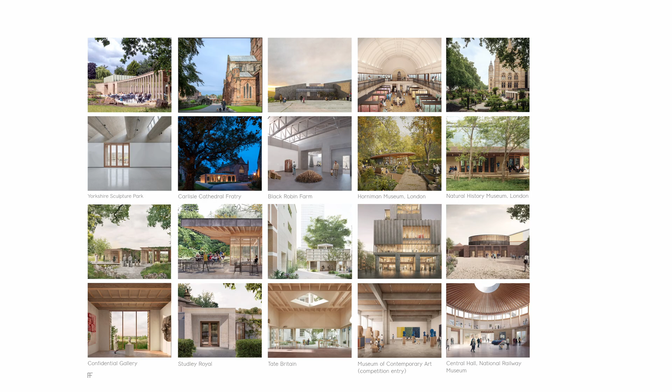And I think visiting our sites is really critical as well. So this was whilst the Natural History Museum was on site, and we take the team to try and develop a shared ethos, shared values, shared references as well. Sometimes that's quite useful.

And these are the public buildings that we've currently delivered and that we're currently working on, ranging from a number of galleries and museums through to landscape projects, and more recently branching into more master plans and things.

The scale of our projects has quite rapidly grown over the last 10 years. On the farm site, the bottom left was the first structure we did. Then this is our studio frame. The next one is the barn at the end. This was Homerton College. And I think we need to do a new diagram for the Railway Museum, which will largely fill this page. So big, broad span timber structures, but trying to use as much craft as possible.

So on Homerton, for example, there are no metal fixings. We don't have flitch plates and things. It's using traditional carpentry methods despite the scale.

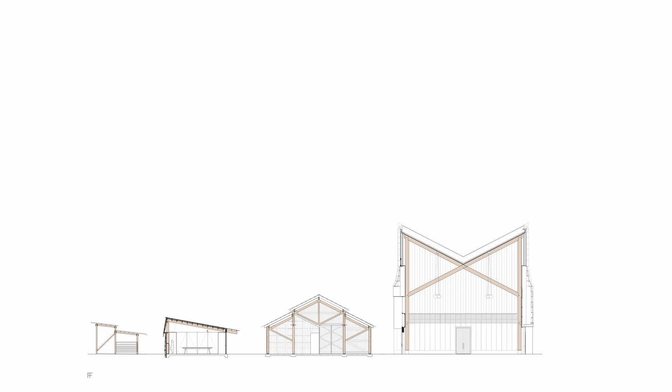I think how architects grow from doing small-scale, beautiful, bespoke projects into something much more large and commercial, but that retains the soul and the feel of smaller projects, is really fundamental. When I look at what happened in the UK with lots of architects, they were delivering exquisite projects, made their name, and then they won some big commercial projects, they grew rapidly, and something shifted. So it is a challenge, but we're trying our best to retain the essential values of where we started.

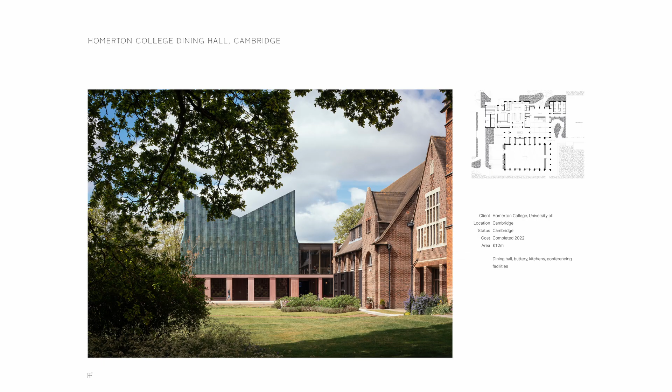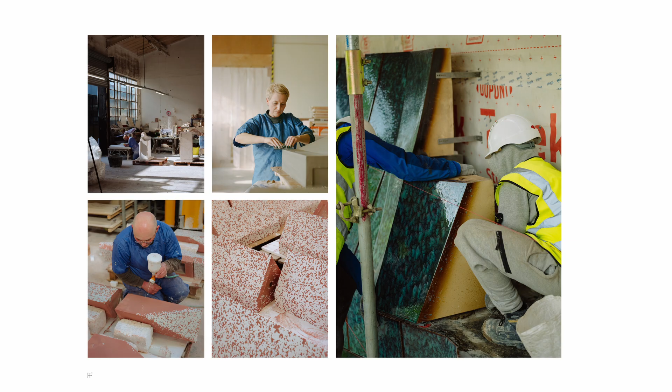So we're working across education projects. This one is at Homerton College, where we developed lots of elements to do with faience and ceramics, using the timber as I described - this is the jointing here.

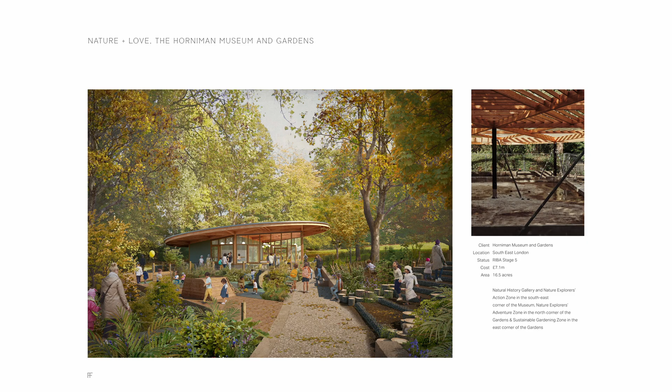This is a cafe and play space down in South London for a museum at the Horniman Museum. And again, landscape and architecture for us are always overlapping.

A big project that I'll tell you a bit more about shortly is the Railway Museum in York, and that one is going on site now. So in 18 months, this project will be finished.

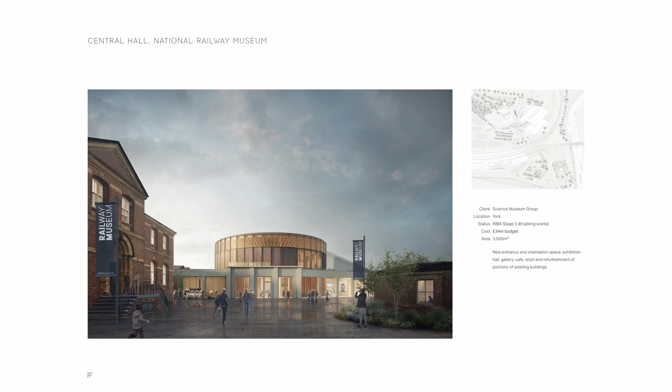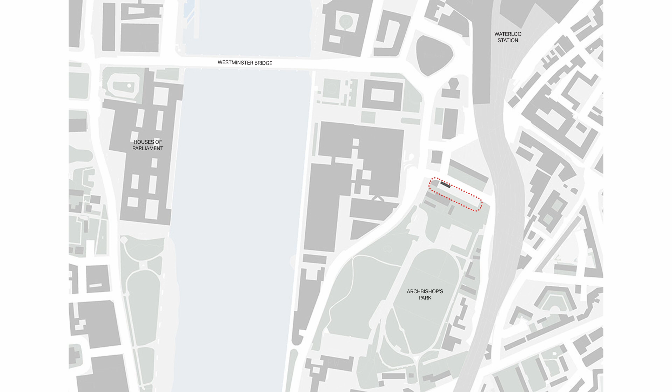Initially, I'll tell you a bit about our studio, just because it's an unusual setting and it's helped us grow as a practice, both developing culturally but also in terms of our design. We've used it a lot to win work by bringing clients through the door and saying, this is a manifesto for our practice, and this building exemplifies what we're interested in.

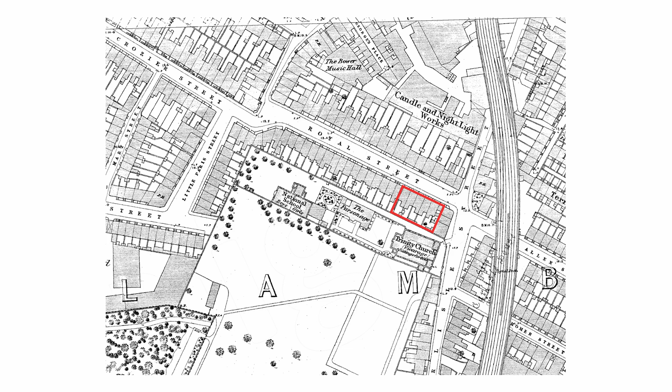When we started, it was a complete jungle - a wasteland. It's a temporary site, and we were told we would have a 5-year lease for free on this site, so we cleared that site. It used to be former terraced housing, which was bombed in the war. Then it was used as a market garden, and it's gone through a series of uses. For the last 30 years it was completely unoccupied. And so we were given 5 years.

Then this barn was being funded in different pieces, and initially they were saying they wanted shipping containers, but the brief to us had been: we want the best city farm in Europe. Now, of course, how you quantify that, who knows, but in terms of design, we were saying, okay, if you want the best city farm, we're not going to do another container yard.

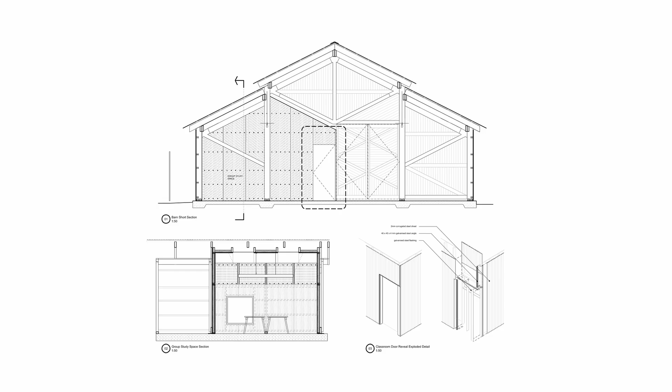We're going to support you with the funding and give you an identity, and this barn could then be used to be rented for weddings and events, and that became the generator to make the whole site sustainable economically. There were some very simple themes here, almost like a church section - we have a nave and aisles - and there was something about the ceremony of putting the barn up, about bringing the community together, getting people invested in it, and about the legibility of everything, so you can see how the structure is made. This barn lasted here for 7 years, and now it's come down and moved to South London.

That's one of the major challenges - all of the projects here were designed to be moved. Initially it was being used as an open structure, and then later on we enclosed it, and it started to get used for different purposes, like having an outdoor classroom and things. So many people have come through this space for different events, people I wasn't aware of, and you find out down the line that a client has actually visited the site for some reason.

But all of this was at risk, and initially quite a big risk. When we built the barn, we thought we would have 3 years. Then the global pandemic happened, and then the economy crashed, and all of these things meant the whole project got delayed and delayed. So we were due to be kicked out in 2019, and we're still there, and we've now taken on a bit more space. Some of the site has moved, and some of it has been retained.

But it was about giving a dignity, giving an identity, and a really robust, simple structure. In a way this is the least contextual project of the ones I'm going to show today, because it was a meanwhile space, derived really through budget and identity. There were references back to agricultural buildings and the long history of the site, but not so much the modern nature of this part of London. But London is a melting pot of architecture, people, and everything, so depending on where you're working, some bits are much more sensitive than others.

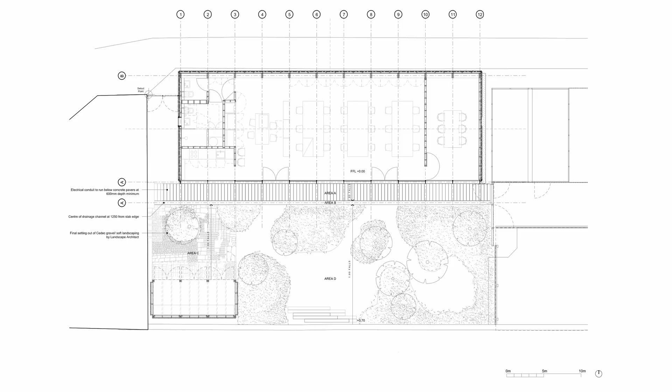I won't go through these bits, but we've done additional structures over time which have come into it. Our studio is very simple - it's a timber frame structure designed to be taken apart, and it's conceived of as part of a wider walled garden. There's a datum, a bit like we have here with the windows, that wraps around the studio, and then we have glazing and the garden. So the concept is that our studio is part of the walled garden, and the two flow from one to the other.

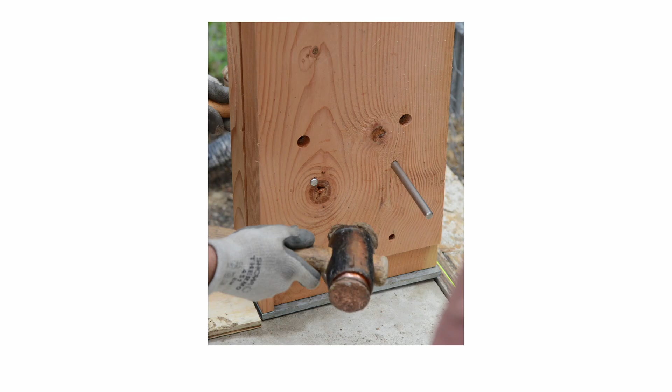And it's demountable, and that's going to be put to the test in the next few years. It was all put up - oh, this is quite a nice shot, because this is a guy called Alex, who was our first employee. He really should have been part of the partnership because we studied with him, and he was with us for 3 years, instrumental in the foundations of the practice. And then he felt that we probably didn't know enough about building, so he went off to become a carpenter.

And now he has an incredible practice called Timber Workshop, doing some of the finest timber frames. It's funny how these things diverge, but his first project was our studio. He then built the barn, and so these long connections of interwoven friendships and all sorts continue, and they're really fundamental.

And quite utilitarian as well, using things like standard lintels from the builder's merchant for our paths, reusing as many of the bricks that we found on site within the paving, and trying to make it as much of a circular economy as possible. And then sitting among these big beasts. But in the future, all of these buildings - there's a master plan to take all of this down and put a new heart hospital, residential things, and all sorts. So quite a big shift.

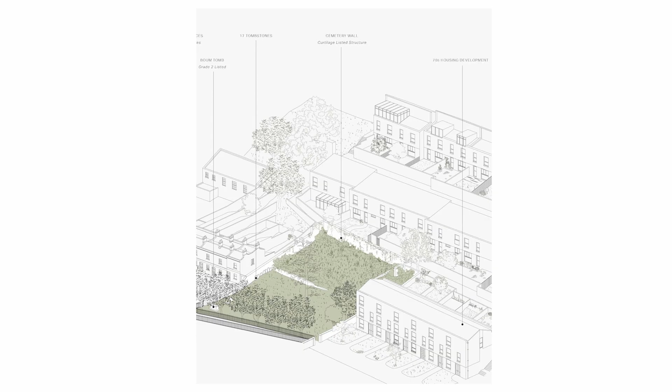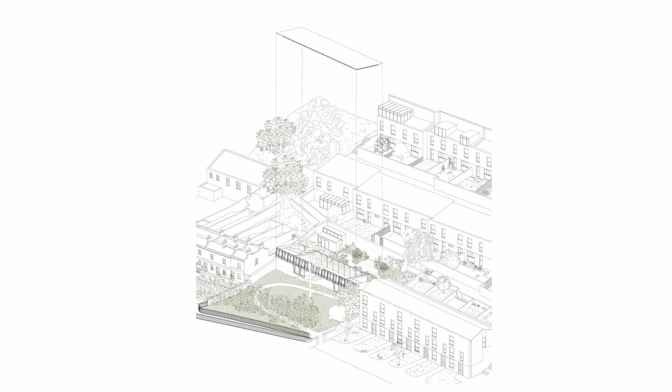In the meantime, we found this - a closed graveyard, closed for 150 years. This is where the studio is due to be moved to, and it will sit very lightly on this graveyard in Bath. So over time, what we want to do as a practice is start to draw a line across Europe from the west - from Bath in the west, London, and then hopefully in the future we'll be doing more European work as well.

So I'm going to talk to you about our first public project, called the Weston. It's up in Yorkshire at the Sculpture Park, and it was won through an invited competition, which is actually how much of our work comes about these days.

I love an invited competition because normally there's the chance to actually meet people and develop relationships, whereas some open competitions, while wonderful if you can win them, make it quite a challenge to connect with the end users and the client.

There was a massive storm, and it was such a big storm that my phone got wet and died, so I had to find my way through instinct, past the crematorium and all these parts of northern England, which are quite depressed to be honest, and then arrived at the Sculpture Park.

So maybe on some level that shaped the approach, thinking about how to create a building that protected you from these elements.

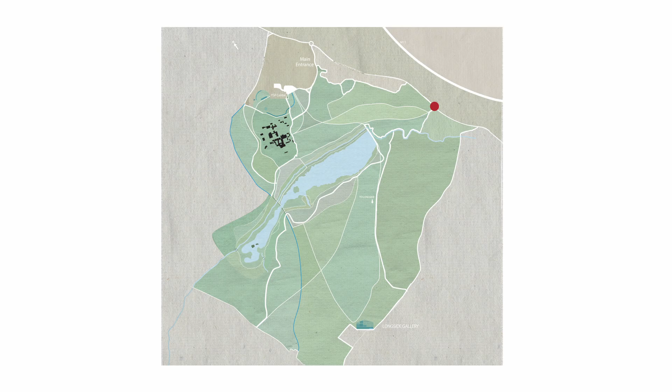I wasn't aware at the time, I knew it was a very special project, but I didn't know that it would necessarily shape the whole future of our practice, especially the connection between architecture and landscape, because that's what we've ended up being known for largely.

So across this site, at the top we have the main visitor centre, and at the bottom there's this place called Longside. People walk across the park, and it had probably 600,000 visitors when we started the project.

But what happens on lots of public sites is you get honey spots, or honeypots - some places are swarmed and overrun with people, and actually the visitor flow doesn't necessarily work as well for the organization.

So they wanted to create new routes, new destinations, which could then open up sculpture trails and things. The red dot is where our project is, and that top swoop in the right-hand corner is the motorway.

The motorway is noisy, it's quite unpleasant. We are a few hundred meters from it, but that was not the context we wanted to look at. We wanted our building to be addressing the sculpture park.

So some of the questions we were facing when we started the project: first of all, what does it mean to build in a sculpture park? Is it a building? Is it a piece of sculpture? Is it something that wants to be a building in the round? Should we use an existing context, or find a completely different area?

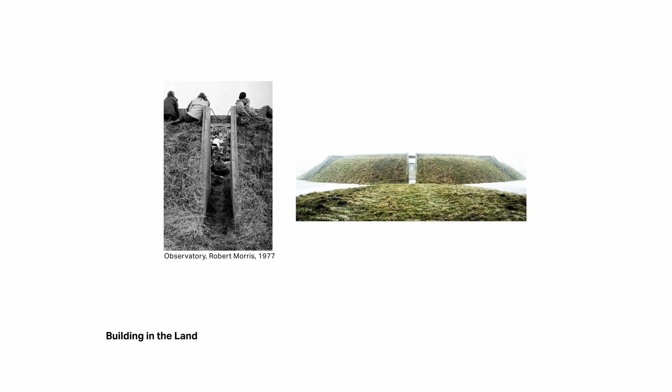And here we've got Robert Morris. This was a piece called The Observatory, and this was about sun paths. So again, layering in all of these different real and perceived constraints and opportunities.

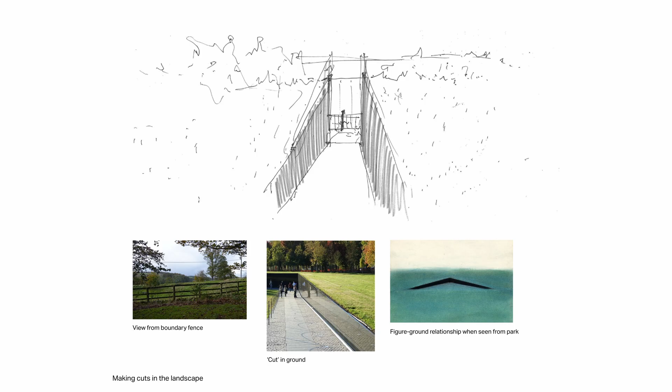At the interview, it wasn't really a design competition as such, but inevitably we wanted to show how we were thinking and how we would approach it. So was it about views, a cut in the ground, a figure in the landscape, what kind of destination, what kind of form, what would we do with the topography here. So just early thoughts on that.

We have the fifth elevation, so you can drop light in. We also have this arc looking out towards the sculpture park, and I always thought of it as having a big wingspan, its arms embracing the people coming across the park.

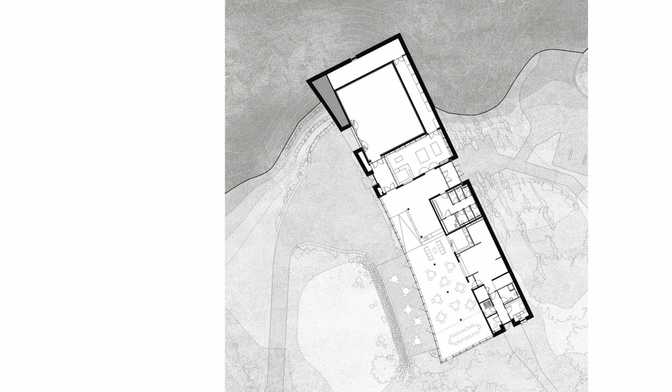And then on this other elevation, you descend into the ground and come through this moment, and suddenly it opens up. So some of the kind of English landscape traditions about conceal and reveal, about mass and light, about texture, smoothness. Some of it was very refined, some of it very coarse.

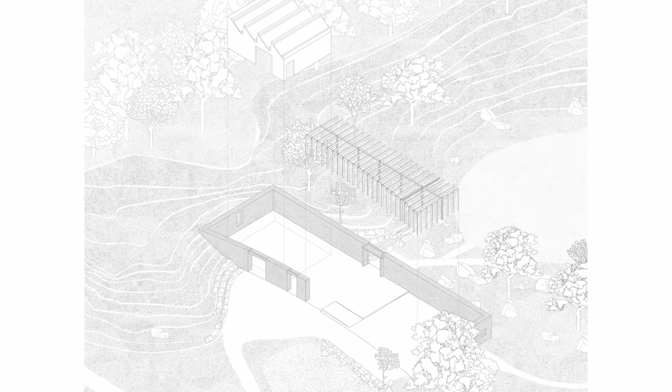Initially it was going to be constructed from rammed earth, but because of a number of factors—regulations, funding, the Arts Council funded it—we couldn't get warranties, so we ended up making it from local aggregates. It did become a concrete wall referencing all of these different rock types and quarries in the area. So we sourced different aggregates from here.

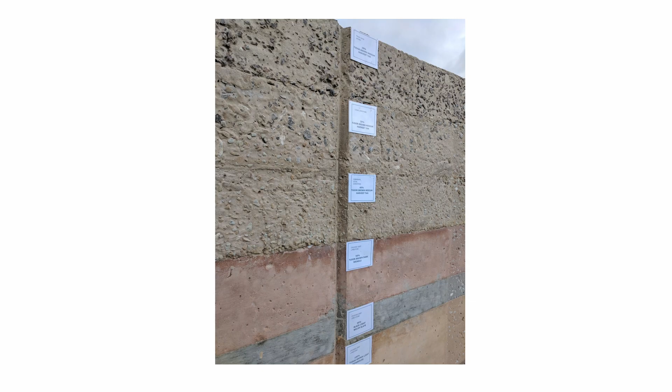And then we did a number of tests to try and find the tones that were like the stone there, which is called millstone grit. It's not particularly beautiful, but it does have certain qualities.

This always made me laugh—I was working with this guy Ross. These are the contractors, and you can see how terrible some of the early trials were. But that's why I think it's important to have prototypes and get involved and understand where things are going wrong and what might happen. If we had just specified it, it could have ended up like a very stripy, hideous building.

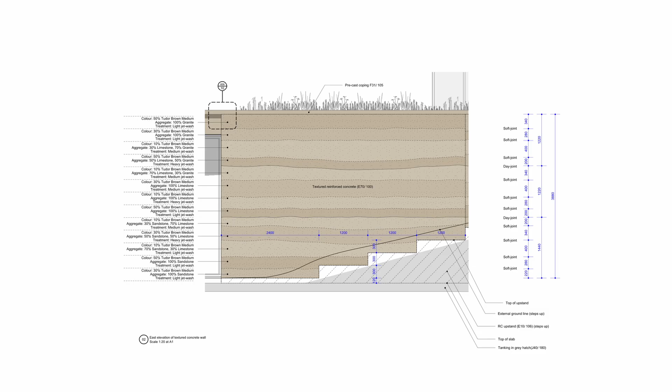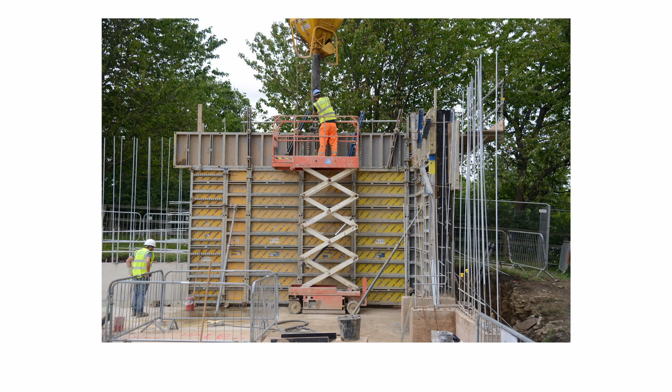So we tried to control it within reason, and we certainly selected all the aggregates, the size of aggregate, and the methodology. Then these guys who had never done anything like this before came along, and there were moments that were unexpected. You can't really see it in this image, but where it was sprayed there were erosions as though it had been there for 30, 40, maybe 200 years. So that was really nice.

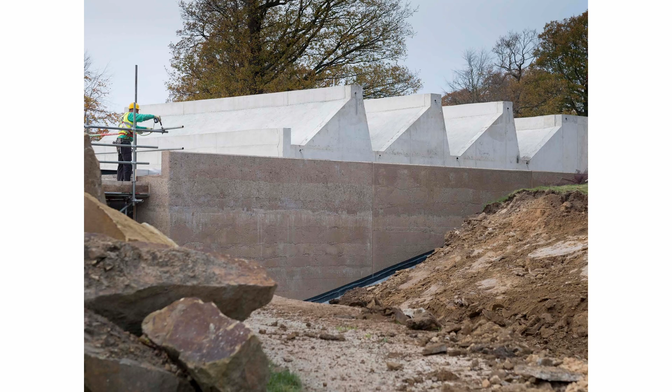And then here you can see the tones—this is the landscape which we've cut away, and that's the tone of the building. In a way, that was almost my favorite point in the whole project, because the gallery has a real presence. You can see the north lights, and then the retaining walls and things were very much of the land, which was how it was conceived.

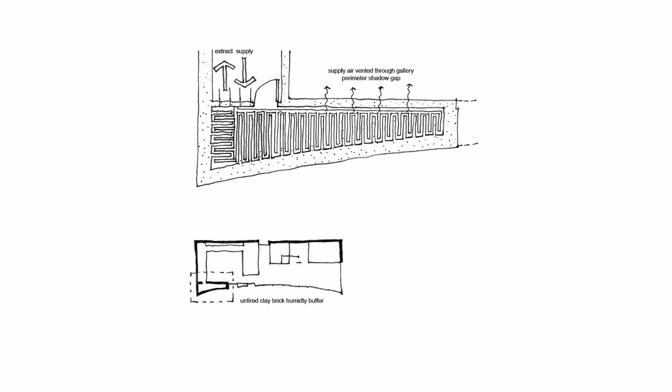And speaking of the land and of clay and of brick and things, we did a humidity buffer here. All of these bricks are unfired clay bricks, so they're hygroscopic, meaning they regulate the moisture content in the air. There are some holes on the right-hand side you can see in the gallery wall. We were regulating the incoming air to get it roughly to plus or minus 4%, 50% relative humidity, which was required for the artwork. You could bypass air through this, but the only shame is people don't see that, though knowing it is a very nice aspect of it.

I think it's always good to reflect on what works and what doesn't work. One of the criticisms of this project, and I think it was totally valid, was that we hid those north lights, that we created a screen around it. For us it was about the light, and you would sometimes read the forms behind it. But in a way that was partly because of our relative youth at the time, and we were trying to do too many things. When it came to judging, I remember them saying, why did you cover those up? It was partly because of cost and things, but really, at the end of it, no one ever comes back in 30 years and asks what the budget was. They just want to know whether it stood the test of time, that it's a robust, beautiful building. One day we'll all be gone, but hopefully our projects will be standing.

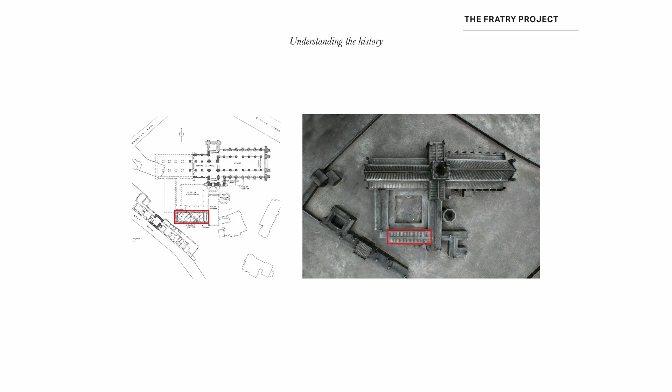But Carlisle is in the far north of England, and it's a hard place to get to. One of the reasons we were told that we won the job was that we said we will be involved throughout. I said that I would be involved throughout, not realizing that many 5:30 a.m.

trains would be quite tiring. But it was all about the relationships. And when we started, there's this building here, which is the old Fratry building.

And then internally, it had curtains, it was dark, it was stained, it was smoky. It was really not a very beautiful environment, although it did have a 17th century library. And the cafe was underneath, and the cafe was a pretty dreadful space, to be honest, in the vaults, and very municipal and a bit depressing.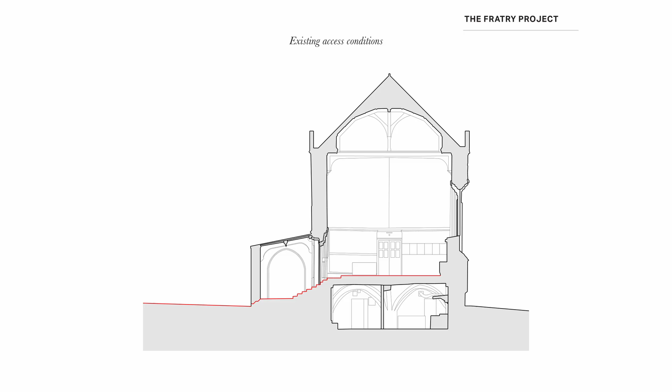And in terms of accessibility, there was no accessibility. You had to come up the steps. So this is that doorway there. You can see, so two flights of steps, even internal steps, a screen in the middle of the main space, all sorts of issues, really.

Actually, a few of our projects have had former lives, former architects and former designs. This was one. Somebody had been working on this for 10 years, and eventually it didn't get support from the key people. The key people in this case were called the Cathedrals Fabric Commission. They're a bunch of very well-to-do, old, generally white English people who, in theory, are there to preserve the cathedrals.

And sometimes they do, but we had to persuade them. So, and actually, I have to say, they were very good in our case. We tried to give a really clear narrative. The narrative was around recreating a cloister and about creating a space in the heart of the city again.

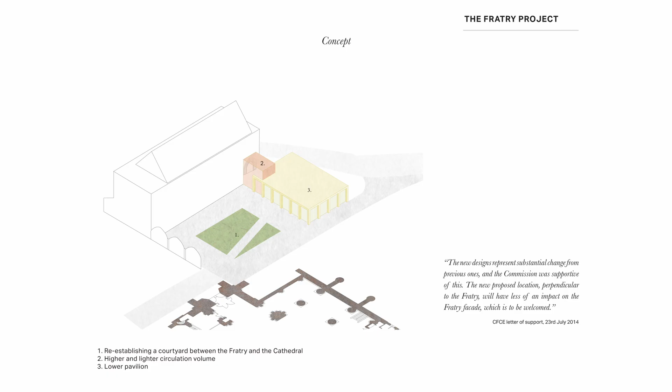So the former scheme was much smaller, but it was hugging that edge of the building where 2 is. It was like extruding number 2 all the way across that yellow box. And we said, I think it should have a smaller connection. I think it should just have a lightweight connection, and then it can breathe in its own right. And it doesn't have to be something that has to be too shy.

And we decided to take the cafe out of the basement and put it into this space. And it was to slow people down on their way through the precinct, and that they could sit in the cafe and appreciate where they were.

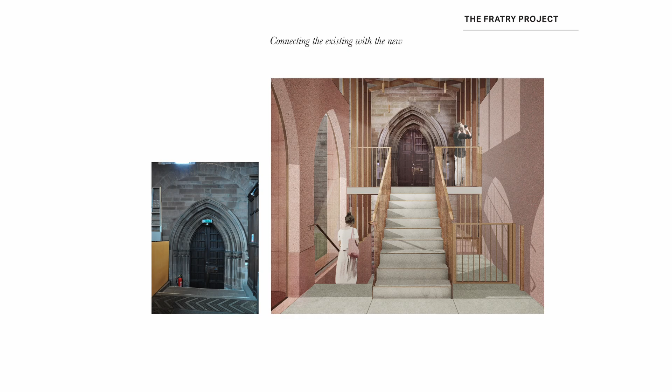Sorry, I don't know whether it's not actually projecting, is it? So you're okay. Can everyone actually hear me, by the way? Yeah? Okay, good. So that would be a shame, wouldn't it, to ask that right at the end.

In the second image, you can't see it, but there's a beautiful lattice ceiling. And that for us was one of the inspirations. So we were just looking around the whole precinct, trying to say, what has happened here?

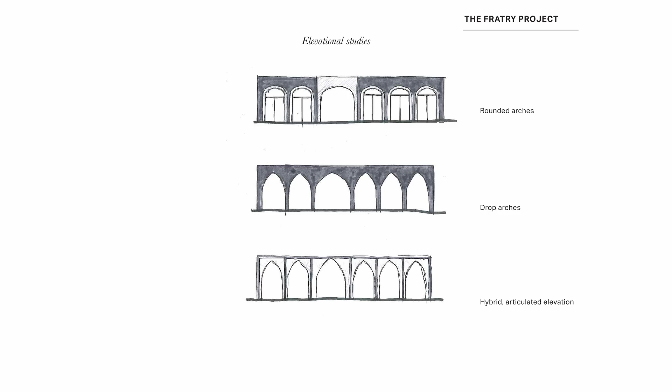And we thought, well, maybe we could explore that. So we were looking at different forms of arches, but in particular the dropped arch. So this is the Fratry, and this was our kind of quite simple analysis of that geometry and how we could take it into the new building.

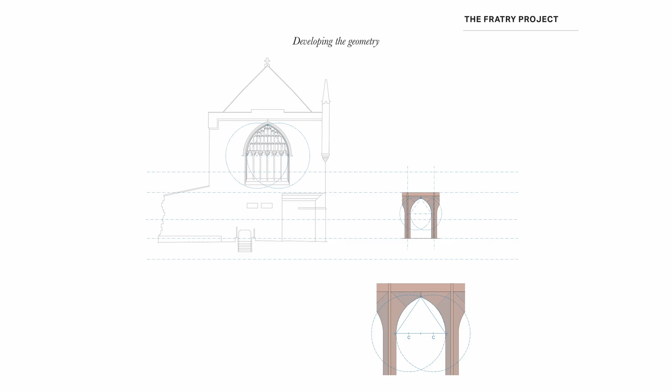So originally we were going to have a rectilinear, much more contemporary building, but we ended up merging the styles, which can be a bit risky, but in order to bring everyone on the journey, that was really important. You can see our building in the background in this elevation, kind of that rhythm running on.

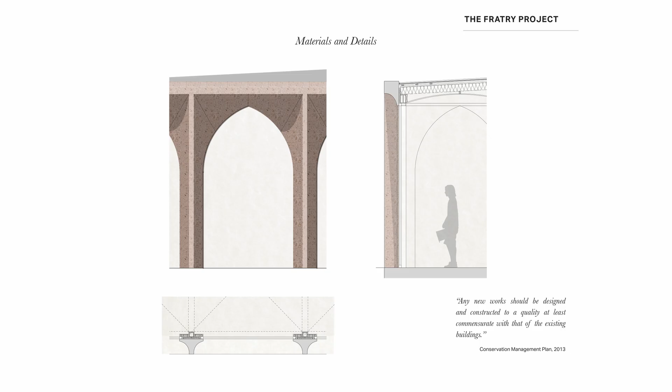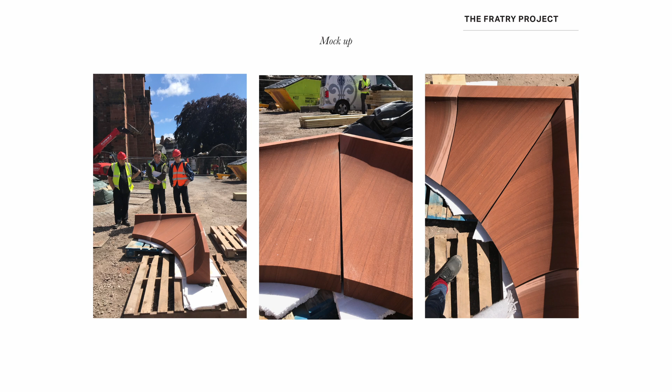The thing which I really liked about it is that it's all using local sandstone, called Locharbriggs, and it has this beautiful veining in it. The thing which I loved was that it catches the light in a different way through the day, and you'll see in a moment with some of the images.

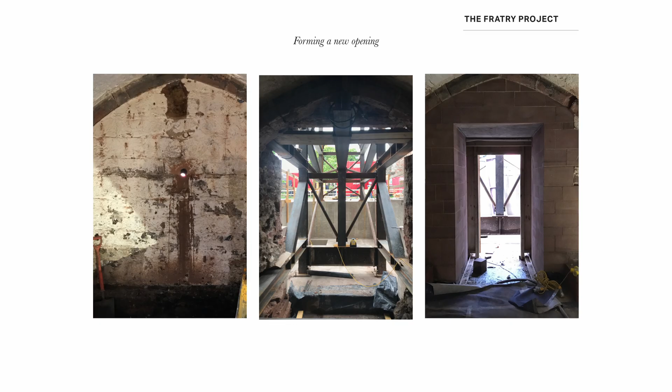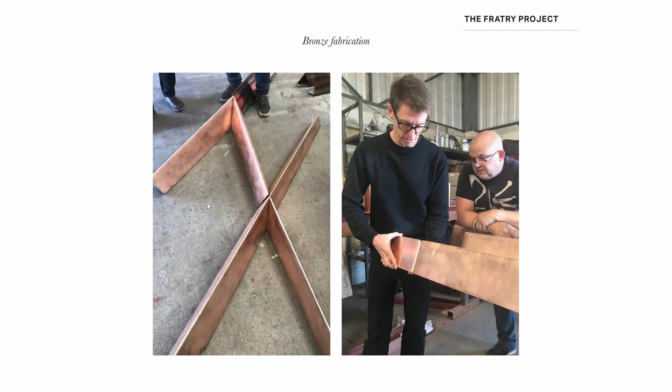So this was reversing that doorway, discovering Viking graves and all sorts of things. The bronze worker, we ended up fabricating it with a bronze worker in Wales. It was a very tight budget, but we had a local contractor and everyone - it was kind of a project of love from everyone really involved.

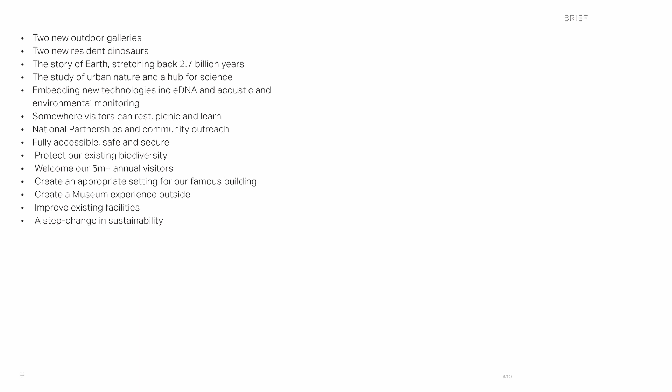So it has to be very hard wearing and deal with huge numbers of visitors. There were so many different partnerships that came into this, but the education and how the landscape was used as a tool for the education was really fundamental.

Luckily, the drawings actually project best, I think, on this, so it's quite good. They've got lots more drawings in this one.

So it's just off Exhibition Road, where lots of the big museums in London are, connecting up to Hyde Park. There's the Victoria and Albert Museum next to it, on the other side of Exhibition Road, and then we've got the Science Museum, and the Natural History Museum is everything in grey here, but it also extends significantly further back. And the main entrance is in the centre, and then they've got these 2 very different gardens on either side.

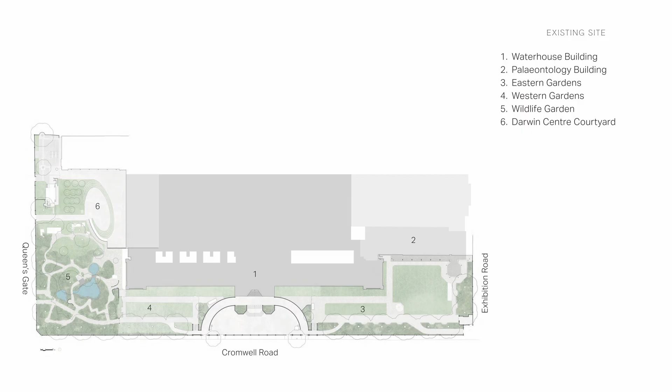When we started the project, the landscape at this site had always been very neglected. It was used commercially - they would put an ice skating rink in the winter on this grass, and they would sometimes have some exhibitions. But really, it was a huge missed opportunity in the centre of London, where lots of people also don't have access to good greenery, especially within a 500-metre radius of this site. There's almost nothing.

There is a huge park further north, but for families and things, when they wanted to come to the museums, it was an internal experience. This is the other side, just a very bland lawn, some amazing trees, and really quite a wonderful resource in terms of this set of ponds and things that was one of the most studied landscapes in the UK, because they have something like 300 scientists working for them, so it was really important that all of the biodiversity from the ponds was retained.

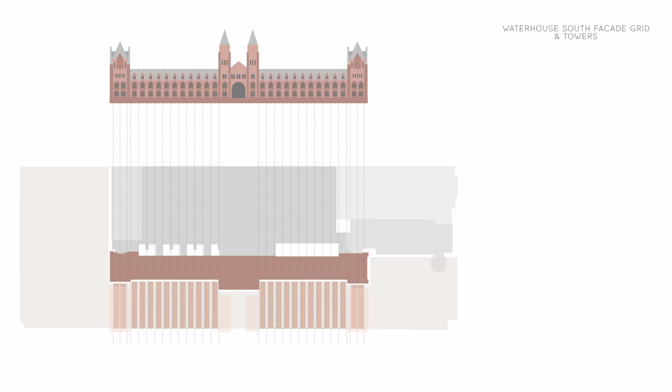So those ponds were lifted, transplanted, and then put back, but all of the species were still there. There's this incredible building by Waterhouse, and very formal, but then the gardens are sunk. So we thought, well, maybe we could reimagine the setting of these buildings and really give them a grounding.

And then there were some very odd bits of architecture on the site, including this oval shape, which was kind of semi-fenced off. That was not part of the project originally, but we said, well, we have a hinterland, we have a threshold to our project, and we want to incorporate as much of this as possible.

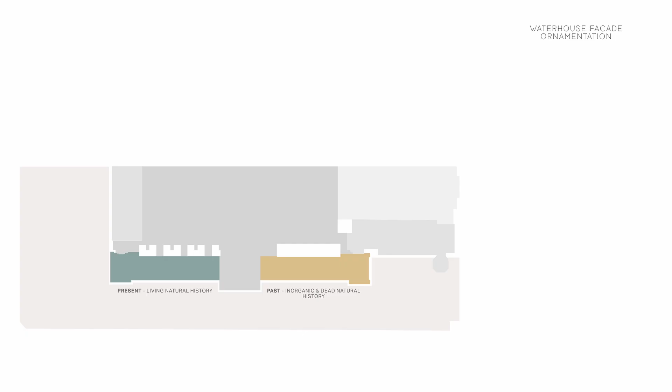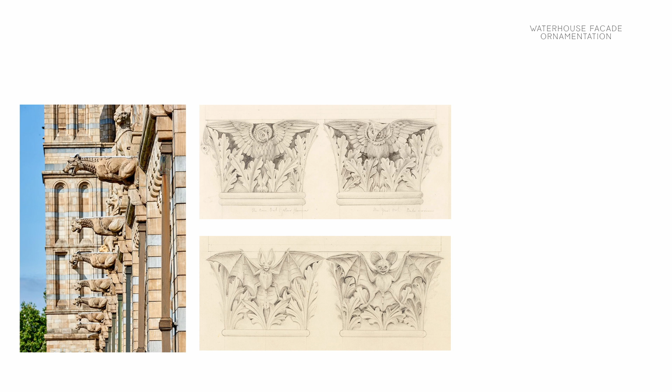On the West Garden is present living natural history. On the right was all about past inorganic and dead natural history. It's an amazing building with all sorts of references within the facade, but it's of a scale that you can't necessarily use the existing building as a learning tool. It's impressive, but these were the points in the brief that we were trying to hit.

So we wanted to create an immersive experience, moving through the Earth strata. A lot of this was about the geology of Britain, and Britain has some of the best geology in the world. Being habitat-led, varying scales, seeing all of this from a range of different perspectives and heights and ages, treading lightly, so trying not to destroy the existing habitats, respecting the historic setting and sustainability and a timelessness.

So we worked with J&L Gibbons, who are a brilliant landscape architect, but it was very much a kind of co-design process. You won't be able to read this, but it starts on the right-hand side, coming out of the tube, and it's the explosion of life. Then you move to the land. Initially, you're going through a very rocky environment where there's no life whatsoever, but it's pre-life.

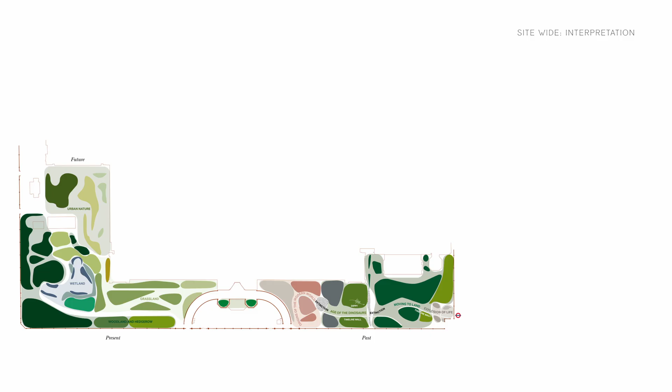Moving to land, then there was a big extinction event, and then after that, you've got the age of the dinosaurs. Again, another extinction event, and then moving up to the modern world, and then all through to kind of much more nature-based learning on the left-hand side. Precambrian through to the Anthropocene, and then looking at these pause points.

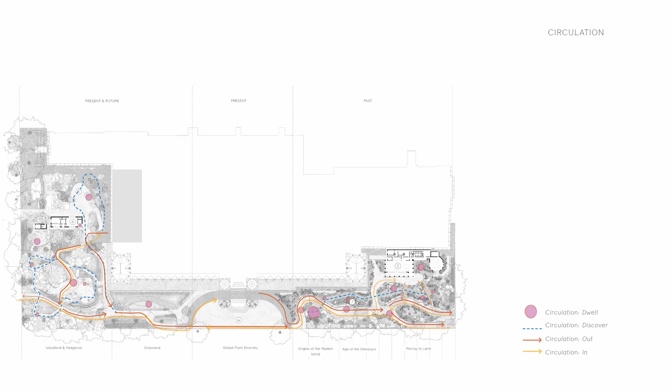So it's interesting, there were many people involved, access consultants, etc. But I do think that so much of design, you need to test it against those constraints. But equally, it's still an emotional experience. It's still a piece of poetry and sculpture and something beyond what one could design using ChatGPT or something. And we achieved that partly through just the sheer number of brilliant people who contributed to this project.

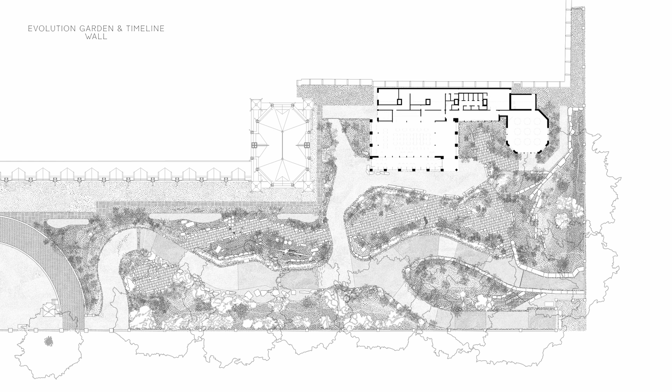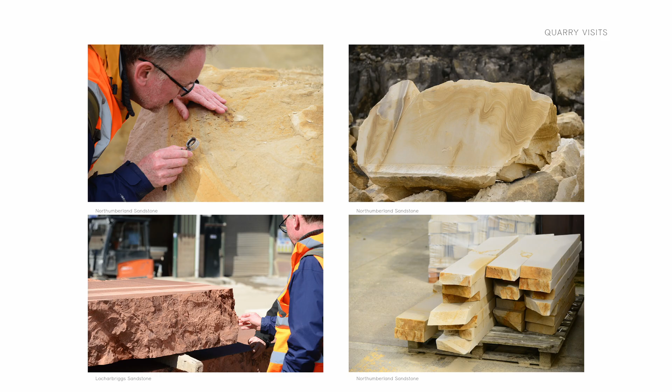One of the big challenges, same with all of these projects, is you might have a concept about how you want to deliver something, but how you make it reality and how you stop it being a piece of pastiche or something that looks too commercial, is one of the major challenges.

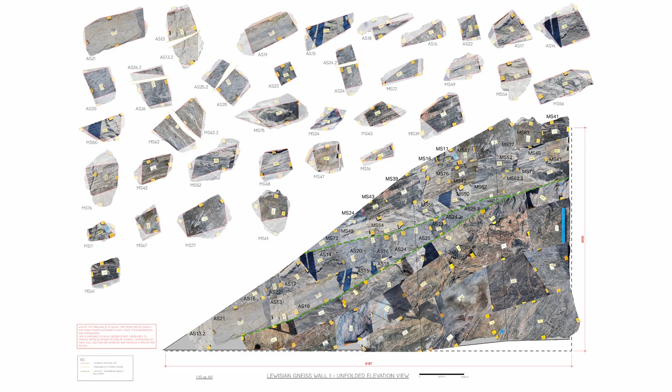So when they first did some samples of this, they were stacking the stones and they looked like dry stone walls and they were really quite poor. We ended up saying that we would map every stone and lay out every stone based on what they had taken to their yard. It was a very long process, but this is a drawing of the timeline wall, which we did for the Royal Academy Summer Show, and it talks about all of those different types.

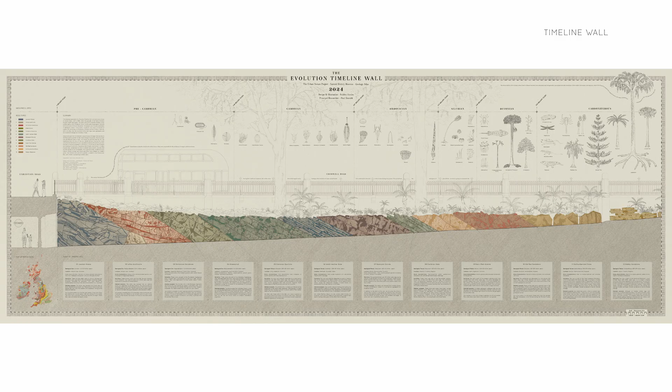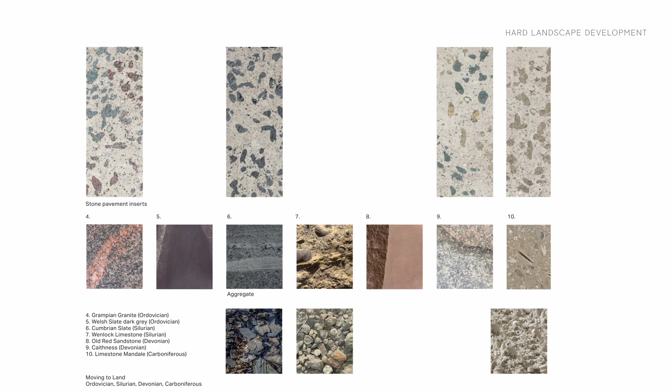And then the paths are using the rocks from the times, so into the Anthropocene, where we actually have bits of glass and pipes, smoking pipes and things. But it's trying to work on all levels. Over the next few years, as the gardens progress and grow up, I think it will become more and more of an immersive experience.

So, yeah, it's been a really interesting project.

I've got some of the buildings, but I'll probably just rattle through those because I think we're doing okay for time, aren't we?

Okay, it's nearly been going for an hour. You're doing well. Somehow there aren't many people asleep in the audience.

It's won some Wood Awards recently, which was really great. Everything is articulated. I think that much of our work, we want it to be legible. So it's based on quite simple principles, axial designs, simple plans, sections, that gives it a legibility. But then it's about the quality of light, the quality of the natural materials, the craft, the moments where you see two materials join, and how those are perceived.

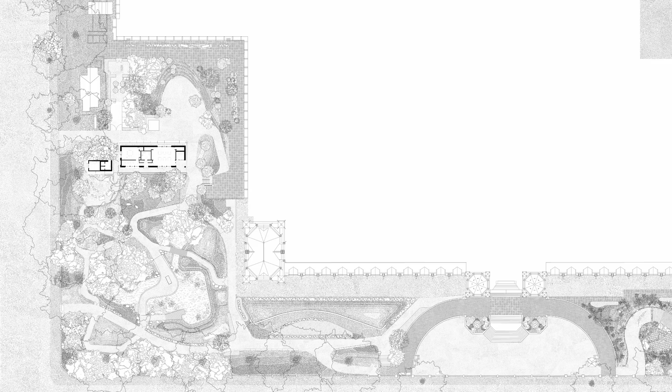On the other side, we have all of this landscape that I described that was taken up, and an education centre. What we wanted to do is drop people down to the level of the ponds so that children and people in wheelchairs can access the dipping ponds and use it for experiments, and again it becomes a much more immersive environment.

And in terms of the interpretation, things like these listening tubes, you listen and there's the sound of a beetle munching away on the foliage and things. So everything is trying to work for different age groups, different abilities.

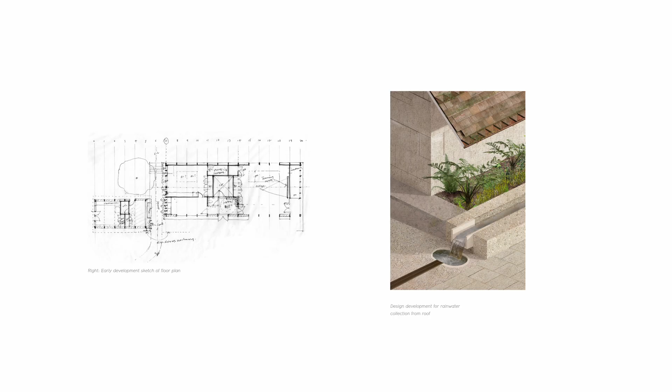And then the Nature Activity Centre is a very simple building, similar to our studio actually, but a much more heavyweight, permanent example, with details where we celebrate the water and things. It sits very low in that landscape. It has an external covered space with a bench all the way along it.

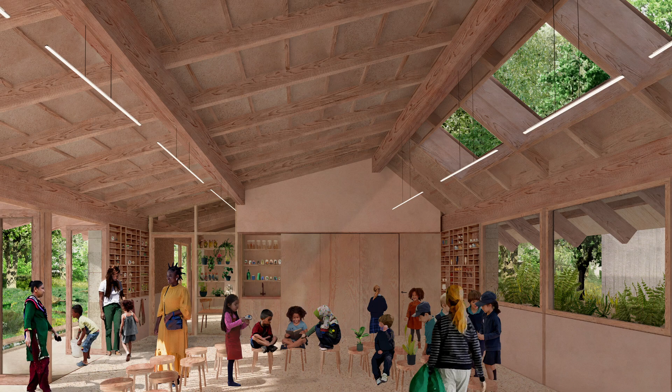And actually, it gets used by so many people. The outside of the building, I think, is used more than the inside, which is great to see, because that's open to all the public. And for people who are interested, they can learn about the different stone types and things.

So I have two more projects, but I will probably just do this one, and then maybe we'll take questions, or maybe I'll try that, because this is another project about to start on site. Starts on site next month.

It's now in contract. The Railway Museum is the biggest railway museum in the world in terms of the number of trains and carriages. It was run as an open design competition, and York was once the busiest railway station in the world, in about 1870, so not within our living memories.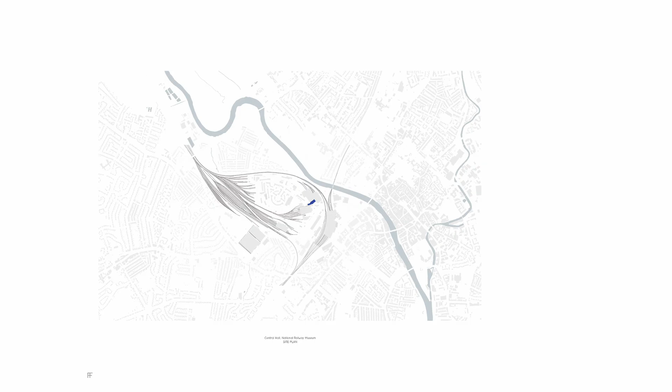This is a plan showing the number of railway lines coming into the site, and it was a mess, if I'm honest. It was an industrial landscape, and it's been an industrial landscape pretty much since the railway was there.

The station has been developed, but they're now going to do a huge £2 billion master plan putting housing to the north, and the Railway Museum is the cultural anchor to that site.

As it was, the current Railway Museum was separated by quite a busy road, and it's taken 5 years to close that road. It's now closed, which is why the project is going ahead.

Our concept at competition was really about combining both railway heritage and the patterns, the motifs, the way that Victorian railway architecture worked, and also museum design. So we were looking at things like the Altes Museum plan, while also looking at roundhouses for railways, which was how they turned the trains, turned the engines.

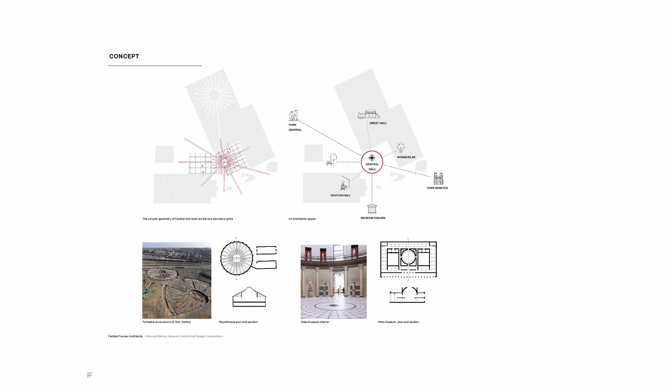And so this is our site. As I say, it's rather messy at the moment. The main railway station coming through York is there at the base, and then we were dealing with these two really awkward geometries.

Our project is in blue there, and it's where the road is, and we're putting a roundhouse at the centre of it.

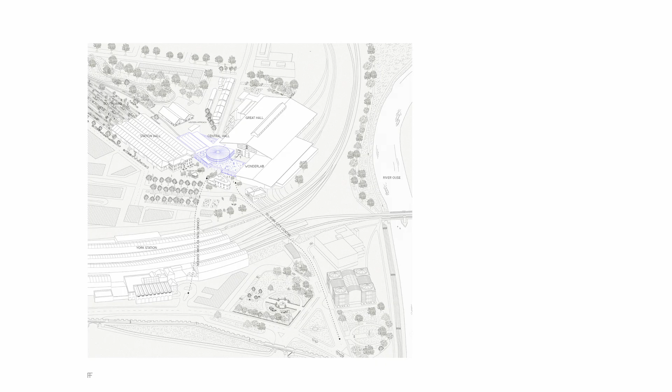So there's often some connection. And then I said, 'Oh, what do you like about it?' And they said, 'We love the way that the environmental performance is working with the unfired clay bricks.' So immediately you go, okay fine, we know what is resonating with them.

And the brief on this one actually said, we don't want anything to do with railway architecture, but it felt so crazy to be doing a project here in this historic setting and not be drawing from it.

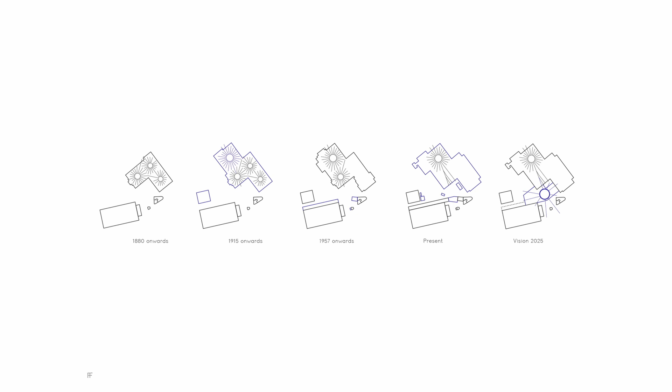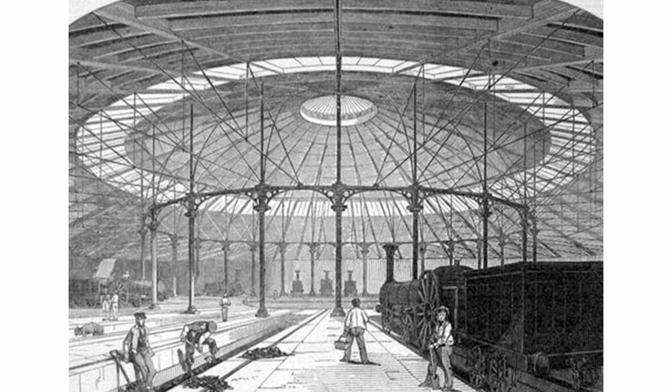And so this was one of the pieces of inspiration. What we're doing is creating a roundhouse at the centre, but in a broad span timber structure. It's a composite structure with an oculus at the top, and then they have a little turntable here.

This space is supposed to be a holding space where you come in and can read the whole museum. At the moment you go underneath an underpass, or formerly under that road, so the one place you wanted to read everything from, you were in a dark box. Our concept was inverting that so that you create a proper space at the heart of the museum.

And then the drum is going to be clad in copper. We've been making some structural models to test that.

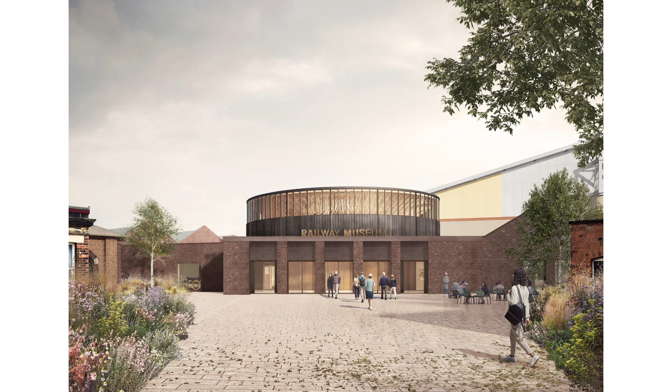I was heavily involved at the start, then less involved for a while, and now we're going back on site. I'm heavily involved again, which is often how my involvement in projects works. And what we're trying to do at the moment is get the materiality to be much more grounded.

It's becoming much heavier. The landscape design is outside of our remit, but I think it's the job of the architect to advocate for not just your building, but everything around it. So I did make myself quite unpopular and had to spend six months having a battle.

To be honest, sometimes you have to be honest, and it was beyond crap. So I said, if we are delivering a public space that we would be embarrassed about, why are we here? Thankfully, everyone has come on that journey. Before, there was no greenery, no planting in the whole space, no seating, no shade, there was nothing.

And so now we've got more trees than is shown here. We've got seating, we've got a range of things.